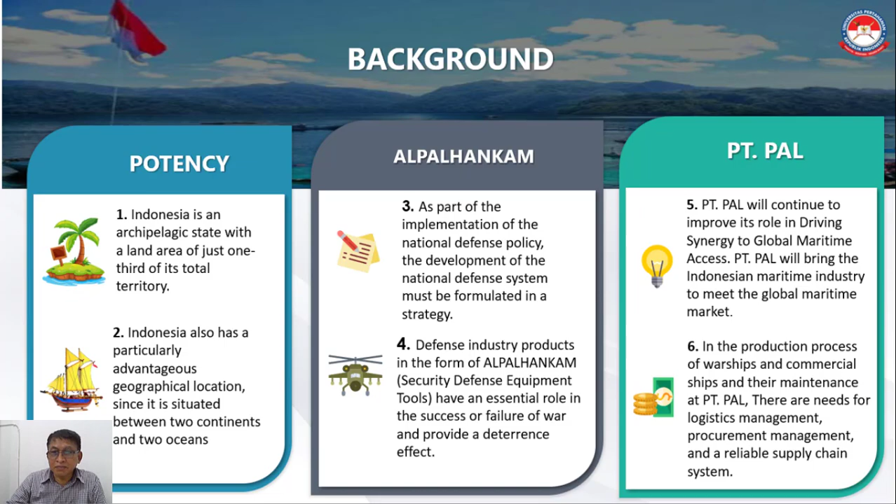The statement of problems has two parts: first, how is the participation of PT PAL as a lead integrator, and second, what is the strategy for empowering PT PAL as a lead integrator.

The purpose of the study is analyzing the participation of PT PAL as a lead integrator and analyzing the strategy of empowering PT PAL as lead integrator in the development and maintenance of ALPALHANKAM.

Next is theoretical benefits, practical benefits, the target of study, and the output of study.

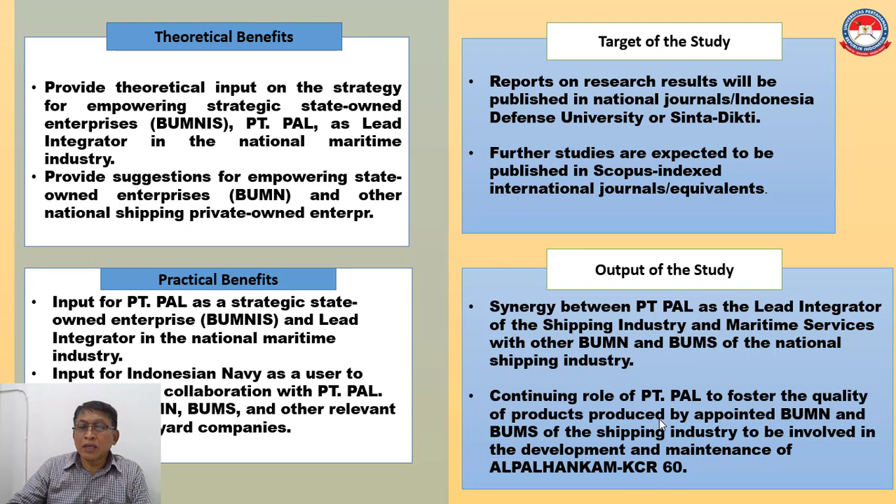First is the synergy between PT PAL as lead integrator of the shipping industry and maritime services with other BUMN and BUMS of the national shipping industry, and the continuing role of PT PAL to foster the quality of products produced by appointed BUMN and BUMS.

The review of relevant literature includes theories such as state defense, strategy, policy, management, logistic management, and maintenance management. We also use theory of analytical hierarchy process and SWOT analysis.

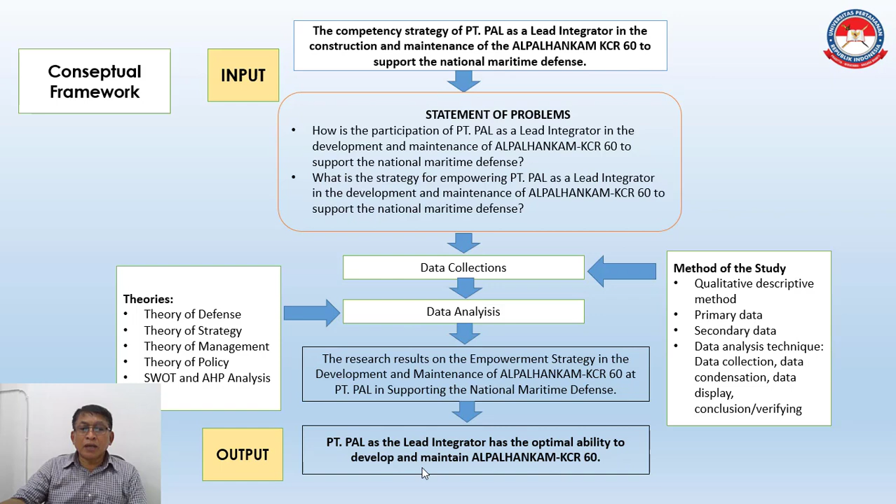For the conceptual framework: the inputs are the competency strategy of PT PAL as a lead integrator and the statement of problems, with theories and methods of study, data collection, data analysis, and the result of development. The output is that PT PAL as the lead integrator has the optimal ability to develop and maintain ALPALHANKAM KCR 60.

Previous research related to our research includes five studies: Priyo Dwi Puryono 2019, Apriani 2016, Bilkis Kibilah 2019, Putri Amalia 2017, and the last, Fuji Diwastuti 2017.

Research time is from April to October, and sources of data are primary data and secondary data. The research object is the empowerment strategy of PT PAL as lead integrator.

Research instruments, data collection, and analysis techniques: the instrument is an interview guideline and recording equipment, and data analysis uses the Miles and Huberman model. The researchers use an interactive model which includes data reduction, data presentation, and conclusion drawing and verifying.

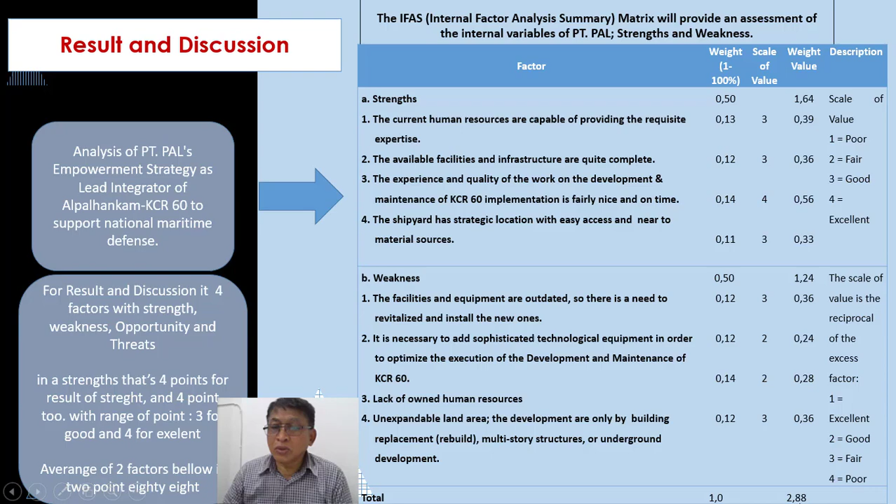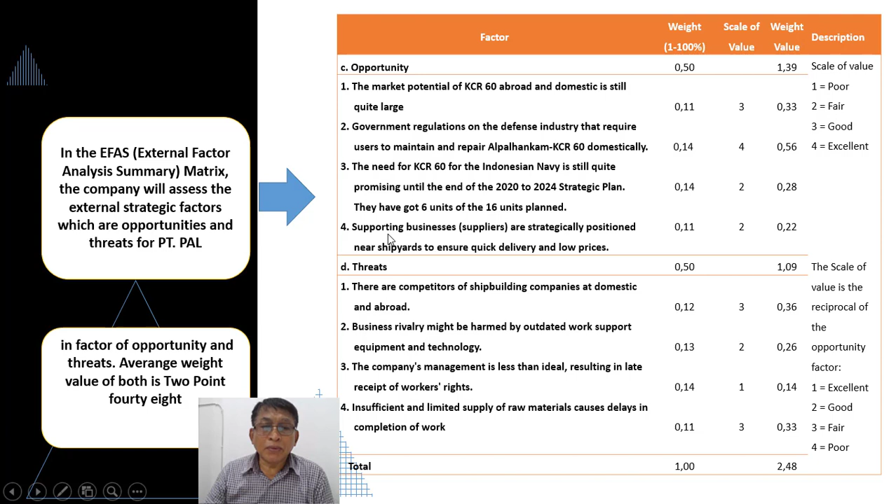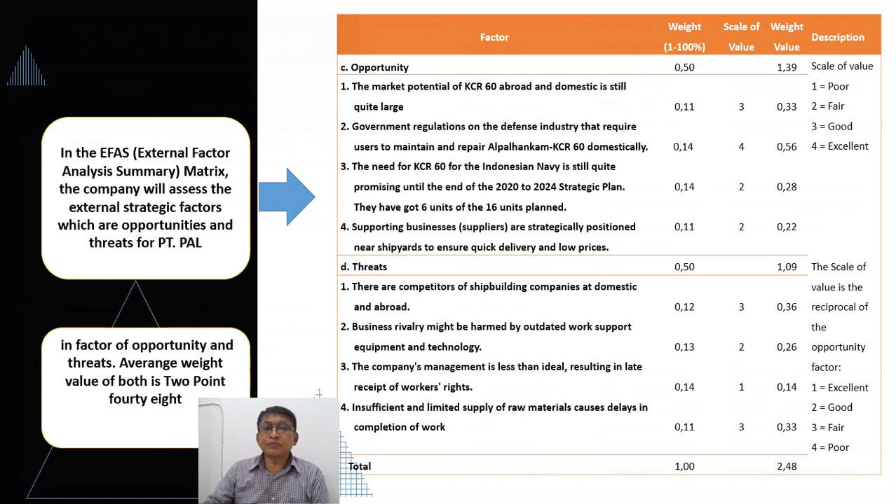The IFAS internal factor analysis summary matrix provides strength factors with 4 points and weaknesses with 4 points, with a weighted value of 2.88. For the external factor analysis summary, opportunities also have 4 points and threats have 4 points, with a total weighted value of 2.48. The SWOT analysis shows strength with development enablers, along with opportunity, threat, and strategy as shown in the slide.

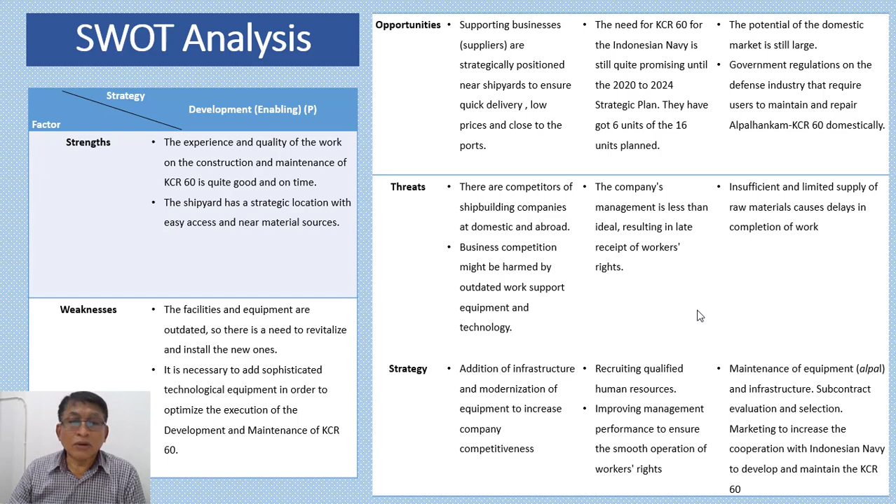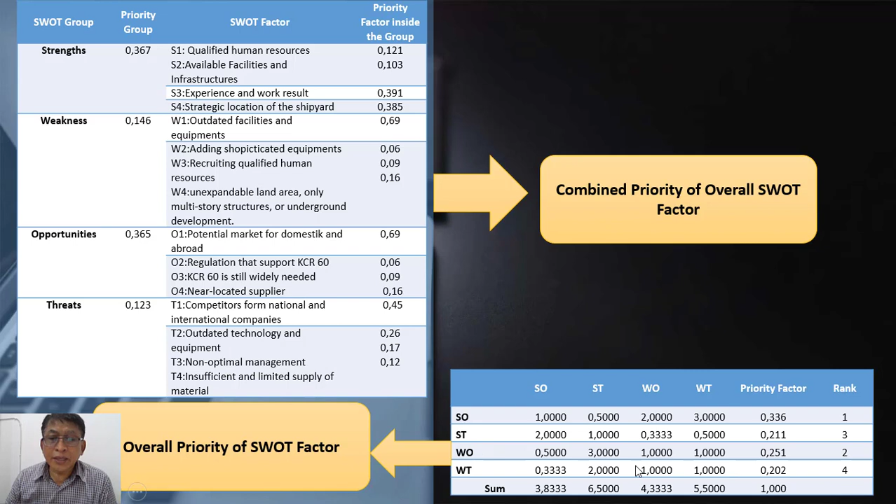Now come to the combined priority of overall SWOT factors. We have strength-opportunity in first rank with 0.336, weakness-opportunity in second rank, strength-threat in third rank, and weakness-threat in fourth rank.

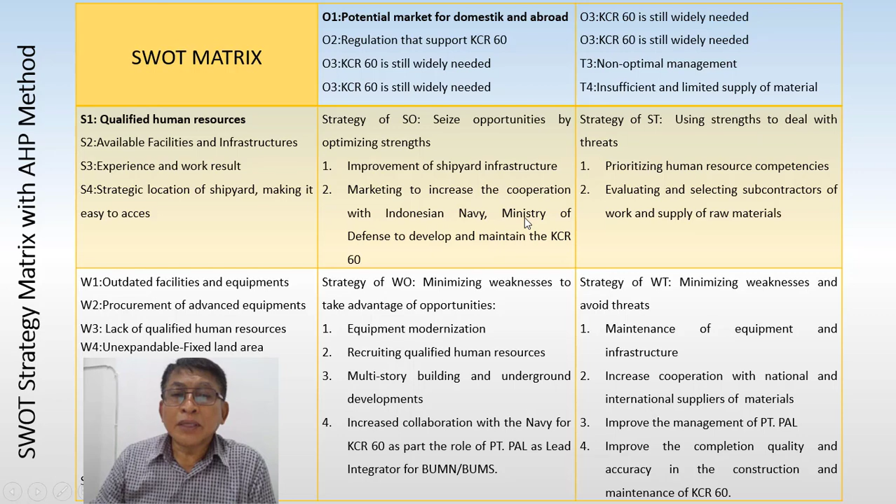For the SWOT strategy matrix using the analytical hierarchy process method, as shown, we come to the strategy of strength-opportunities with 2 points: first, improvement of shipyard infrastructure, and second, marketing to increase cooperation with the Indonesian Navy and Ministry of Defense to develop and maintain the KCR 60.

Come to the conclusion, we have 4 points. First point, the empowerment of PT PAL: until the end of the 2020-2024 strategic plan, it is planned to build a total of 16 KCR 60.

It's equipped with 4 C802 anti-surface missiles, and 16 KCR 40, equipped with 2 C705 anti-surface missiles, built in China.

Second, PT PAL has built 6 KCR 60 units so far, 4 of which have been finished and are being operated by the Indonesian Navy, while the remaining 2 units are still being developed and will be completed in 2022. It is effective that PT PAL and the Indonesian Navy have secured one of the best KCR 60 prototypes, which will serve as a template for producing a significant number of KCR 60.

From the second point, the analysis of the development of PT PAL's shipbuilding business followed strengths, opportunities, weaknesses, and threats. According to the AHP analysis, the priority strategy taken was the strength-opportunities strategy with 33.6%.